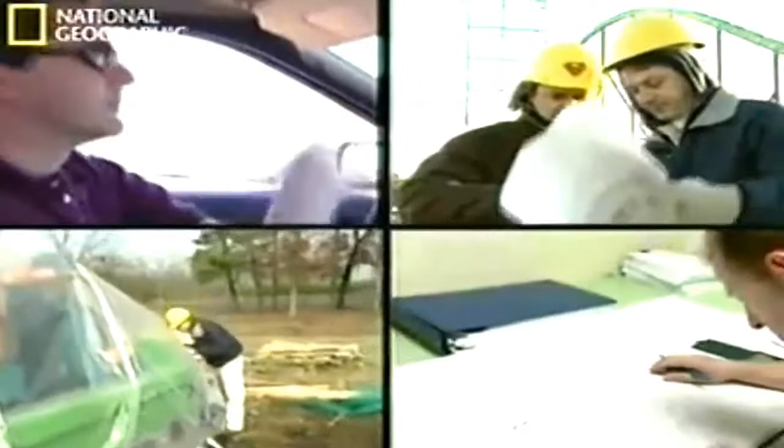This is ground zero of the roller coaster wars. On this empty patch of dirt, a crack team of engineers hopes to conquer the record books and build the coaster that rules them all. But it'll take a mountain of steel and technological wizardry to pull it off.

This is about bragging rights. For all its thrills, an amusement park's signature coaster is the one that counts. It is these monuments of pure power and speed that draw the big crowds.

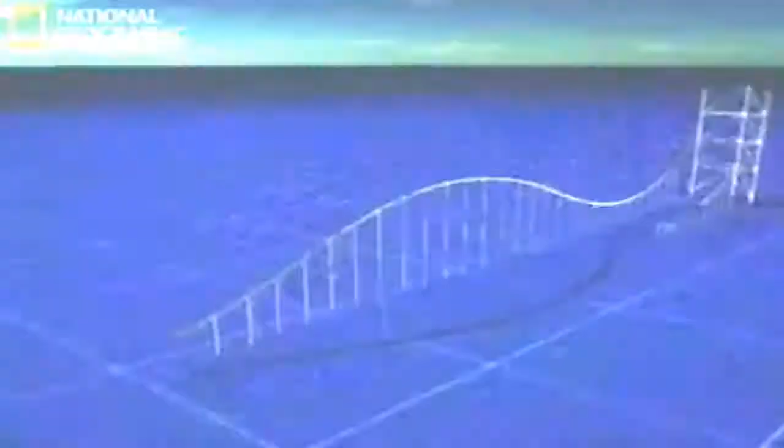If all goes to plan, they'll launch Kingda Ka in one year. It's a tall order, at 45 stories high, and accelerating from 0 to 206 kilometers per hour in 3.5 seconds. This ride will be the closest you'll get to getting shot off the deck of an aircraft carrier, or pulling out of a dive in an F-16.

We've got to bring a crane in. But are the designers behind Kingda Ka pushing the technology to the breaking point? The track record for this new breed of rocket coasters is littered with mechanical problems. Will it be safe? Is it worth the $25 million risk?

In the hyper-competitive world of amusement parks, you bet it is. When you tell the public that the tallest roller coaster is in your park, people who aren't interested in roller coasters or parks are going to take notice, and they're going to be curious, and they're going to want to go to the park to even just look at it, even if they don't ride it.

In the last decade, the roller coaster wars have escalated. 61-meter megacoasters have been around for years, but in the spring of 2000, Cedar Point Amusement Park in Ohio threw down the gauntlet, breaking through the 91-meter height ceiling with Millennium Force, the first giga coaster.

For speed freaks, the watershed moment came in 1997 with Superman, The Escape at Magic Mountain, California, shattering the 161 kilometers per hour barrier.

Up until 10 years ago, all roller coasters operated on a simple propulsion formula. A slow chain or cable lift pulls the train up the first hill, releases it, and gravity takes over.

Rocket coasters such as Kingda Ka have rewritten the laws of coaster physics, throwing out the idea of the slow ride up the first hill. Rocket coasters are shot out of the starting gate like a fighter jet is launched off an aircraft carrier.

The shuttle, or catch car, inside the track is locked into place like a coiled spring. The coaster is loaded onto it and cocked like the hammer of a gun. They pull the trigger and boom, away you go.

Simple. Not really. At least not at speeds in excess of 161 kilometers per hour, and not if you're the chief engineer, but we'll come back to that.

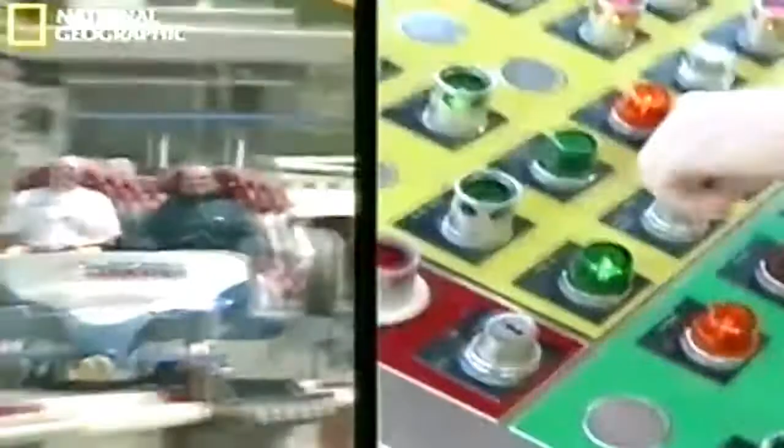In 2003, a new rocket coaster shocked the industry, taking launch technology to another level and shattering two world records. Top Thrill Dragster at Cedar Point, Ohio stands a gut-wrenching 128 meters high, making it the first strata coaster, accelerating to 193 kilometers per hour in about 4 seconds. It's the closest thing on wheels to a real top fuel dragster.

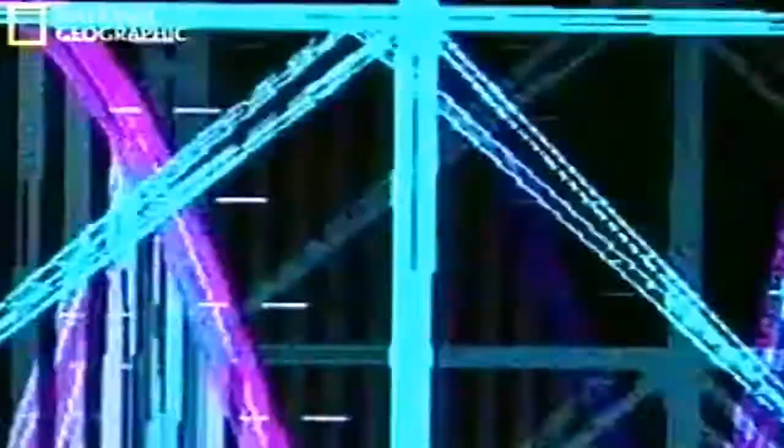Enter Kingda Ka, the monster ride destined to cut Top Thrill Dragster down to size. March 2004: the brain trust from Six Flags Great Adventure in New Jersey teams with Swiss manufacturer Intamin, the builders of Top Thrill Dragster. The concept for Kingda Ka is unveiled.

Yeah, looks like it's all here. Great. The idea is to begin with the blueprint of Top Thrill Dragster, but to build their new coaster, Kingda Ka, even bigger, faster, and better.

The amount of power for this ride is substantial. The stakes are higher, much higher. The question is, how far can they push the technology? Can it be done? Can it be done in time?

The money people are adamant. To be worth the estimated $25 million investment, it has to be ready to ride for the start of the next season.

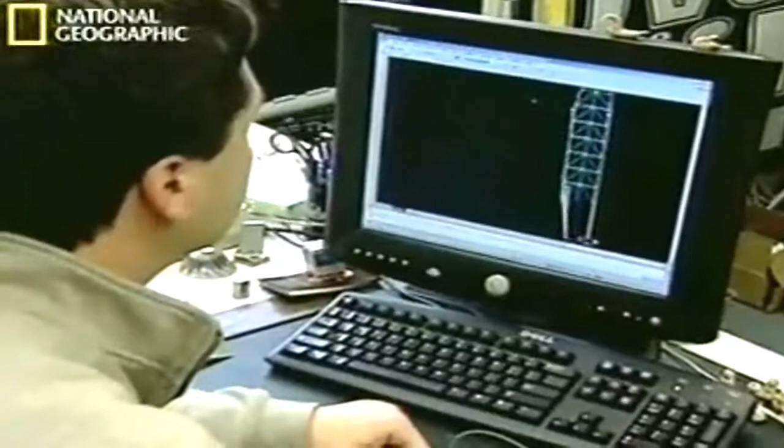Turning to one of the most sophisticated CAD design software programs around, the idea begins to take form. Every meter further and kilometer per hour quicker drives up the cost. Every change in the geometry of the track affects the stress on the rider's body. The formulas for G-forces must be recalculated. The design goes through hundreds of minor variations.

We talked about different heights, how high did we want to go. We looked at the possibility of one with two hills on it in the back, and we decided to stay with the single hill.

The final design is a 950-meter-long track, packing the maximum thrills into the park's allocated space. Its centerpiece will be this soaring 139-meter tower, 4/5 as tall as the Washington Monument, breaking the old record by 11 meters.

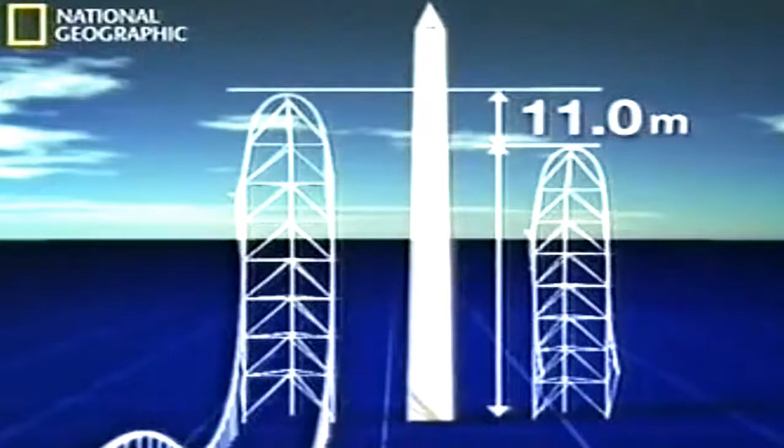The designers can even experience the ride from the passenger's point of view. First, the launch at 0 to 206 kilometers per hour in 3.5 seconds. You are shot up the tower faster than you can say, "Get me off this thing." Coming up to the top, we're going to slow you down real nice for that nice look around, and the next thing you know, you're going to be diving at the ground.

It's probably impossible to describe how this would feel to the average person who has never been in a jet fighter or maybe a motorcycle, but even that is no comparison. This will pin you in your seat. It's nothing like you've ever felt before.

Kingda Ka goes into production under a cloak of secrecy. If one of the other super parks were to find out about their plans and steal their thunder by launching an even taller, faster coaster, Kingda Ka would be a huge waste of cash. In this business, second isn't an option.

August 2004. An A-list of engineers converges on the east coast of the United States, daring to build the dream coaster. As they begin digging the foundation, their deadline is set: April 23, 2005. They have less than a year and the clock is ticking. So far, so good. If they fail, Six Flags will lose money by the bucketload.

Because of the magnitude of the project, we had to get an earlier start than we typically do for other coasters.

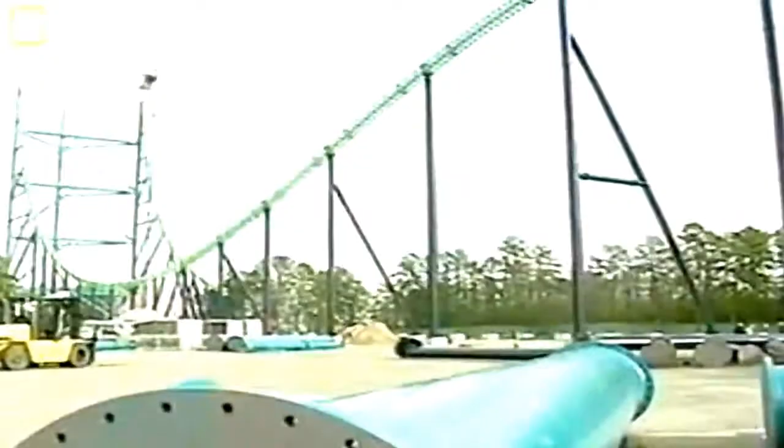One crew works on building the giant tower, while a second crew works on the smaller Camel Hump Hill, approximately 45 meters away. They take advantage of the warm fall weather to get as much of the coaster's track done as possible.

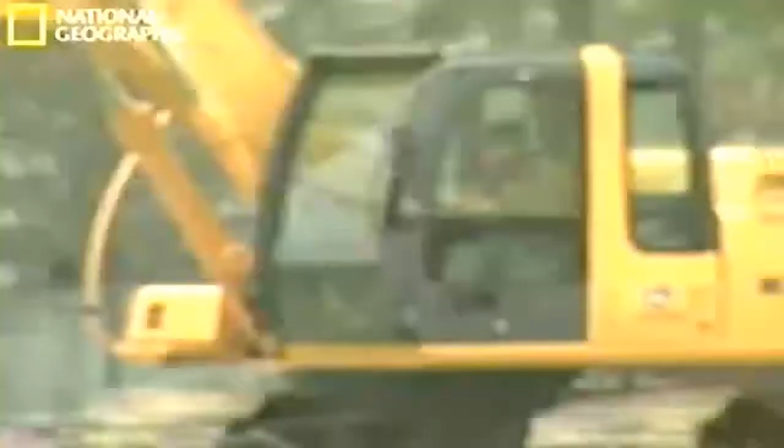By November, the coaster is beginning to take shape. The plan is to work non-stop 7 days a week, even during the winter months. But just when they're making progress, a severe rainstorm shuts them down. Little do they realize that this is just an omen. There is much worse to come.

It is now late November, and the brutal storm that has shut down construction of the world's tallest, fastest roller coaster shows no signs of letting up. The deadline of launching Kingda Ka next spring is in serious jeopardy. Every day the rain falls is like watching thousands of dollars go down the drain.

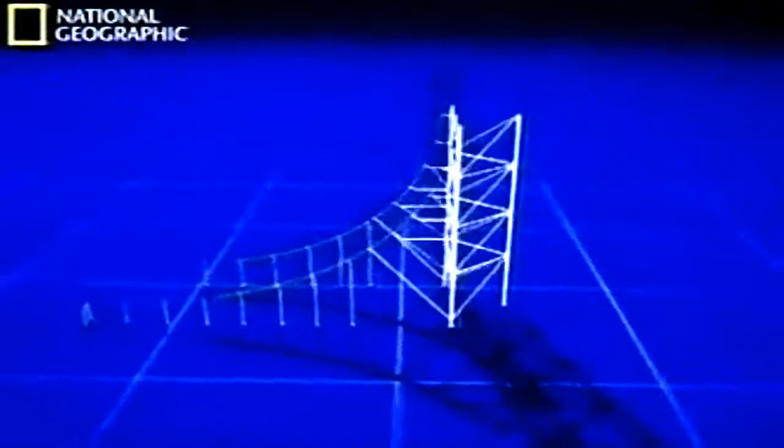One crew is supposed to be working on the mammoth 139-meter tower that stands half done. The other team is trying to finish the 39-meter high Camel Hump Hill. But work is at a complete standstill.

We've been pushing hard to complete the tower as early as possible so that we can avoid days like this for any of the high work. As you can see, there's nothing going on in the air. It's rainy and windy.

At these extreme heights, the danger from the heavy rain and winds is magnified. Moving around on dripping wet steel is inviting a fatal slip. The delicate task of maneuvering heavy sections of track into place is out of the question.

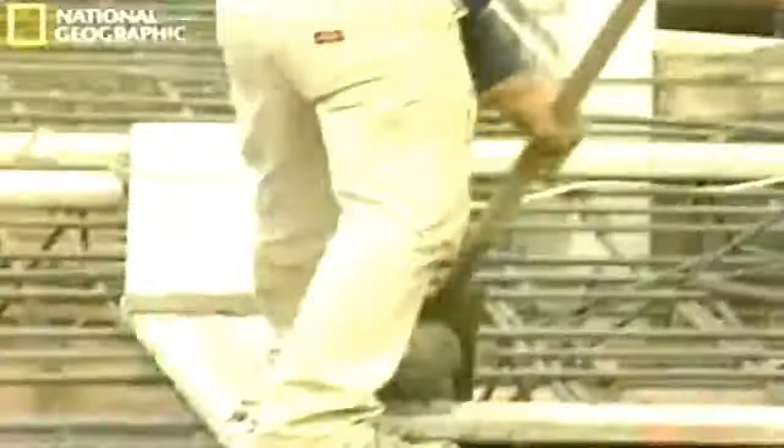Down on the ground, the picture isn't getting any prettier. The rain has flooded the foundation of the hydraulic room that will house the coaster's launch system, the heart and soul of the ride. The crew has extra work to do, pumping the water out. The clock is ticking, and it seems the hole just gets deeper and deeper.

Finally, after a lengthy setback, the storm abates. The crews will now have to work overtime to try and claw back the lost time.

Mother Nature's not been very kind to us. We've had problems. We've had a lot of rain. We've had a lot of wind. Yesterday we had fog, so we couldn't see the top of the tower from the bottom. The cold's not so bad, but the wind is killing us. We're behind where we want to be, but we're working hard to get caught up.

A few weeks later, it appears their frantic pace has paid off. The 950-meter-long track is taking shape. They're nearly halfway there. The team is about to achieve an important milestone.

The topping off of the Camelback, the second highest point on the coaster. This 39-meter hill is designed to give riders a last burst of airtime, lifting them in their seats as they crest the Camelback and head for the finish.

Its completion gives the crew a boost in morale, but they know they are a long way from the finish line. Looming in the background is a reminder of bigger challenges to come: the completion of the record-breaking 139-meter tower. If they're to have any hope of finishing the project on schedule, they need to top off this main tower by year's end.

Time for a reality check. There are now only 20 shopping days to Christmas, and the crews break for the holidays. They have more than 30 meters to go.

Every meter higher, the more difficult the task becomes. Right now, with days like today, it's a bit in question, honestly. We're going to keep pushing hard to make that happen, give everyone an early Christmas present, but it's going to be tight, really tight.

Then, almost on cue, Mother Nature intercedes. A wicked winter storm blows in. Temperatures and the spirits of the crew plummet. The wind chill is 26 below zero. The force of the winds is too strong, grounding the cranes. Once again, progress on the main tower is frozen. They have no option but to wait out the storm.

Throughout December, work on the tower moves in fits and starts. The storm eases. They rush to the cranes and attempt to secure another piece of track in place. Then the winds pick up, and the vicious circle begins again. It's a frustrating, expensive process. Anytime we have a hiccup or a slowdown in the field, it's an awful lot of money and time wasted.

As they move their way up to the 120-meter mark, they are in hallowed roller coaster airspace. Only Top Thrill Dragster, at 128 meters, stands between them and the record. Engineering at this altitude is extreme.

There is one silver lining. The unfinished structure is standing solid against the full force of the storms. Not too far from the New Jersey coast, Kingda Ka has to be built to withstand hurricane force, over 160 km/h winds. For extra reinforcement, there are catwalks that serve as lateral braces in the arch of the tower.

As the workers look down from their perch at 121 meters, the magnitude of the project begins to sink in. In spite of the setbacks, they are now only one rung in the ladder away from topping it off. Now only 2 shopping days until Christmas. There is hope. They schedule the topping off of the tower for the last week of the year.

Once that last piece is bolted into place, Kingda Ka will take the title of the tallest roller coaster in the world. But the New Year's celebration isn't to be. Another cold front moves in and the crews are sent home for a bittersweet holiday.

The only thing that is clear about Kingda Ka's schedule is that making their April deadline to launch the ride will be an uphill battle. And every centimeter of progress will be hard-earned. We've been trying to get it topped out for a little while now, and weather's been pushing us back between wind and rain and fog. We've been having a rough go of it.

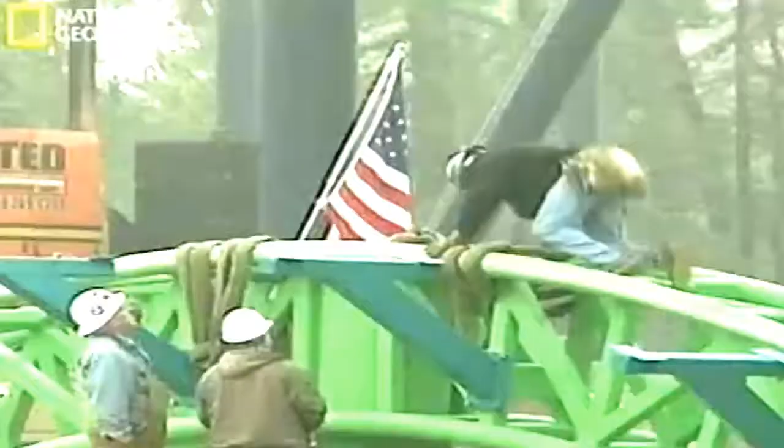The topping off will have to wait until the new year, when it finally happens it'll be the crowning moment in coaster history. If the final arching piece of track is even a centimeter off on either side, the tower will have to be reconfigured. With the eyes of the media and coaster fans watching, will this, the most important piece of the puzzle, be a perfect fit? The hopes of the engineers and the fate of Kingda Ka hang in the balance.

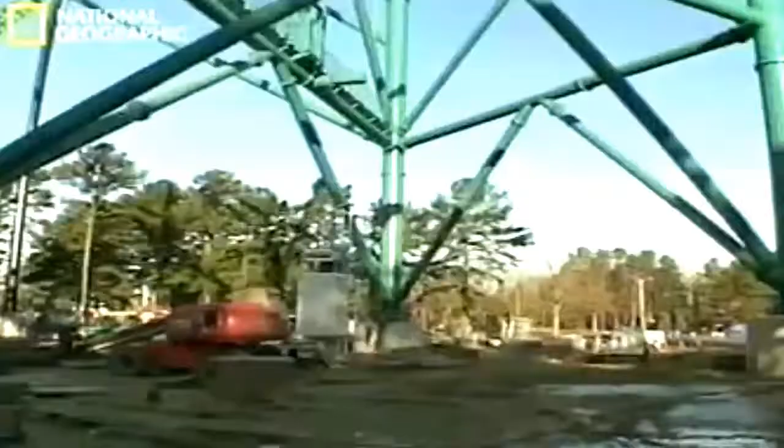Engineers are working overtime trying to top off the soaring 139-meter record-breaking tower of Kingda Ka. We're going to have to make the top first, and capture the title of the tallest roller coaster on Earth. It's now mid-January 2005. A horrible run of winter storms has delayed this critical event by nearly a month.

Today, the engineers are determined to make it happen, no matter what the weather. The crowd gathers early in the morning. The media has been invited in force. Cameras and eyes are trained on the top of the structure to witness this historic moment when Kingda Ka is crowned the king of the coasters.

Unfortunately, there's a new dilemma. Fog is looming all around the top of the tower. The crew can't believe their bad luck. This is a delicate operation, and visibility for the crane operator is essential. Will the engineers have to send everyone home and reschedule yet again?

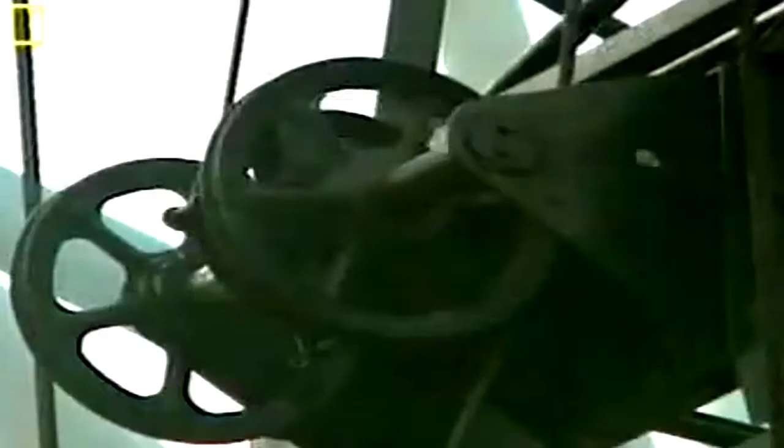They decide to go for it, hoping the fog will lift just long enough to fit the final piece in place. The crane team concentrate on what they call the pick. When they lift the crowning piece of steel track, it must be at a precise angle and level.

It's a long way up. The choreography must be perfect. So when we set the top piece on, we may have to push those track pieces out just a little bit to allow us to fit in properly. We can go very quickly, or it may take up to upwards of an hour or two, depending on how difficult it is to fit the piece in.

Almost on cue, the fog breaks, and there's a clear view of the top of the 45-story tower. Finally, it's time for liftoff. They make the pick.

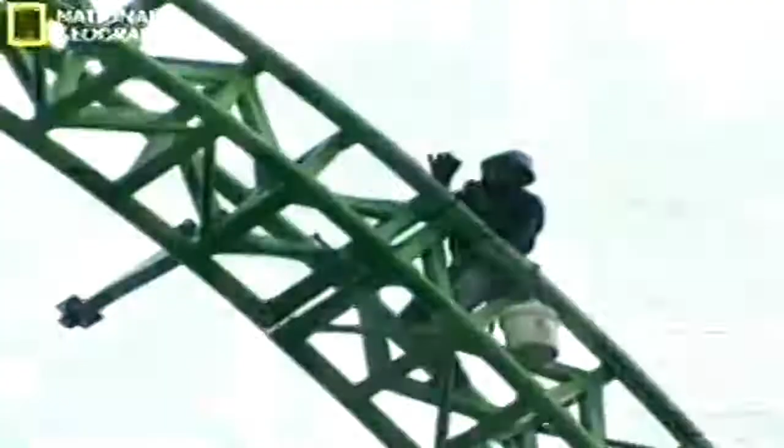Everyone watches and waits. The fit must be exact. It is a game of centimeters. Touching down. The Eagle has landed.

After all the weather setbacks and delays, the record-breaking tower is finally complete. It's an historic day for the engineers and entire crew at Six Flags. They picked it quickly, they set it in, and they were able to make it up very, very quickly. Much faster than I thought. I actually thought it would take a lot longer.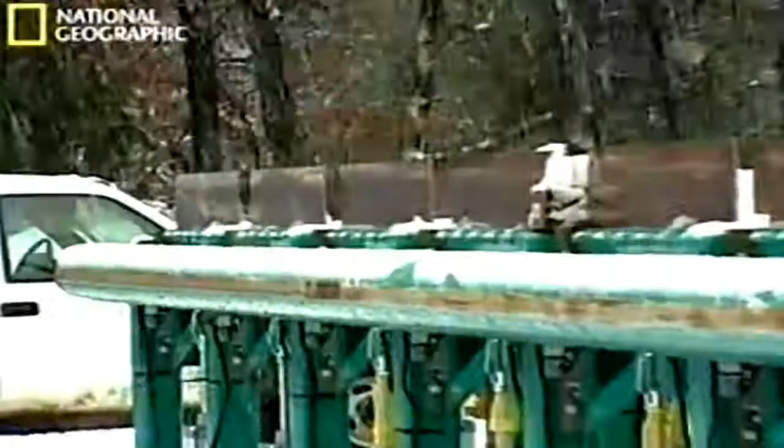But their luck is fleeting. Their nemesis has returned with a vengeance. Another bitter storm blows in and dumps over half a meter of snow on the job site. Instead of firing up the cranes, workers fire up the snowplows. Another day goes to waste.

While the track work on the fastest coaster on Earth is going painfully slow, there is good news at the base of the main tower. Inside this hydraulics building, the parts for the launch system are arriving as scheduled. It's like a late Christmas for the mechanics as they begin piecing together the components to the most powerful hydraulic launch system in roller coaster history.

Building the highest coaster in the world is a huge challenge, but the real catch is breaking the speed record. That's enough. 0 to 206 in 3.5 seconds is no joke. Unleashing this awesome power is a hydraulic launch system more massive than anything of its kind in the coaster world. 12,500 horsepower in a single blast, and more than 12 times the horsepower of a Formula One race car.

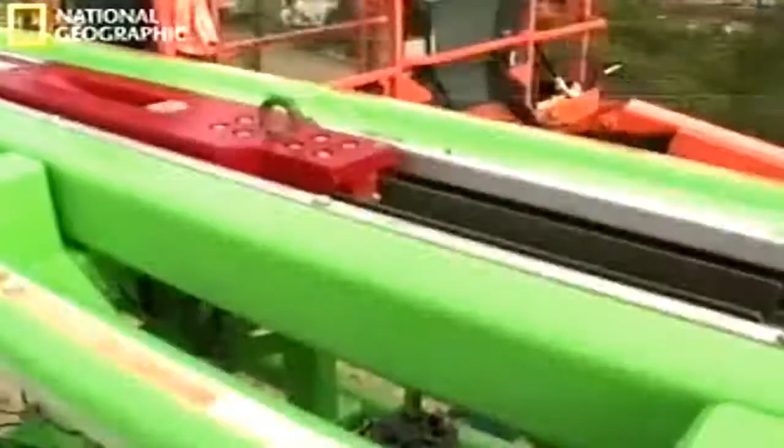The launch system is basically a high-tech catapult, and when it's all put together, it works like this. At the starting gate, the train of roller coaster cars are loaded and locked onto this red shuttle, called the catch car, which is pulled along the track on a cable. The hydraulics are what powers the cable.

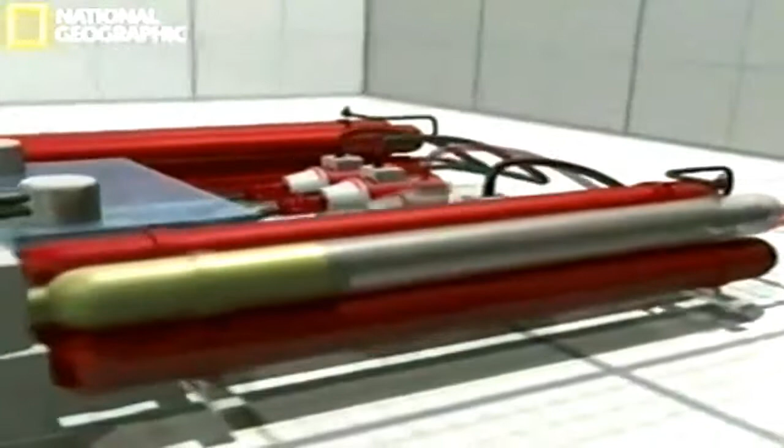When the operator pushes the launch button, there is no turning back. The hydraulics spring into action. 18,927 liters of hydraulic fluid is forced through a series of motors. The motors spin a giant drum that rapidly winds the cable, pulling the coaster down the track and up to the top of the tower.

The engineers like to think of the hydraulic system that powers the launch like a big squirt gun. I like to think of it sort of like the world's biggest super soaker system. A super soaker works when you pump the handle and you put high pressure air into that little tank, and you pull the trigger and the air blasts the water out. With a price tag of about $5 million, that's one expensive super soaker.

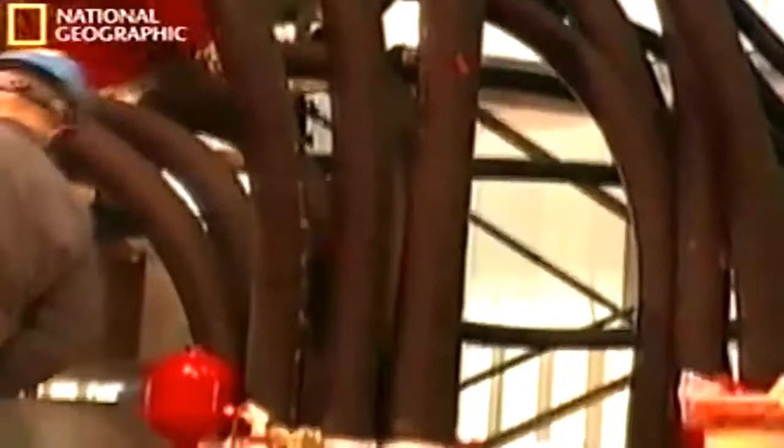After a few weeks of tinkering, the launch system resembles a giant spider. Massive hoses sprawl out of the drum and motors and connect to the hydraulic fluid reservoirs. It's slow going, but if they don't get every connection right the first time, they'll have to take it apart and start again.

They are still waiting for delivery of the most important component of the hydraulic system, the massive accumulator tanks that are the heart of the ride, pumping the hydraulic fluid through the motor that supercharges the coaster to record-breaking acceleration. Accumulators are like the heart of the ride. It's kind of like the way a heart pushes the blood around through the body. The accumulator pushes the hydraulic fluid through the motor so you can get the launch up to speed. Got it? That's good. The mechanics are getting nervous.

They should have come 2 days ago, but the trucks are running behind schedule because of the heavy snowstorm. But on the third day, their luck turns. The trucks carrying the accumulator tanks have arrived. The hydraulics are about to get a serious power boost. But first, they have to get them inside. Each of the 4 accumulator tanks weigh 18,143 kilograms. They'll have to be hoisted out of the trucks by crane.

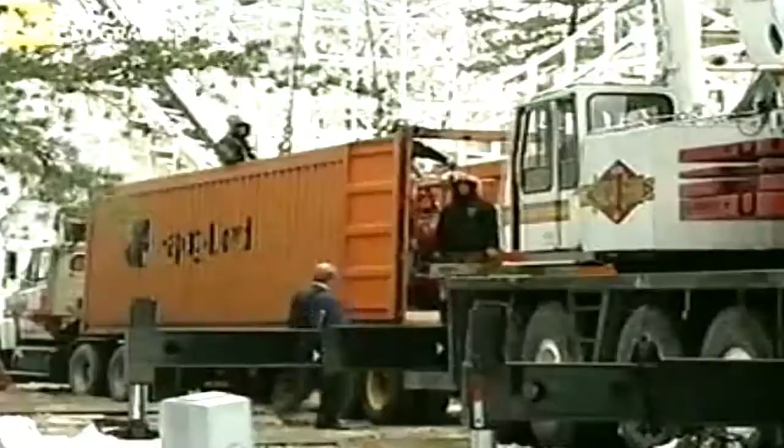One false move, one break in a connection could send the accumulator to a premature death. It would be a fatal blow to Kingda Ka. The accumulators take a year to make. There are no spares.

It takes all day, but at last the accumulator tanks are in place. And the countdown to the most powerful roller coaster launch in history has begun.

I've never dealt with a hydraulic system like this. But deal with it they will. In trying to eke out every last drop of acceleration, they must ensure that every last component of the launch system, the track, and the cars can handle the stress. Every part has a breaking point, a fact of engineering that might come back to haunt them when they least expect.

With the accumulators in place, they're poised to begin the next phase, the test launch of Kingda Ka. It's one thing to build it, but will it work? Will the biggest, fastest roller coaster on Earth clear the final hurdle?

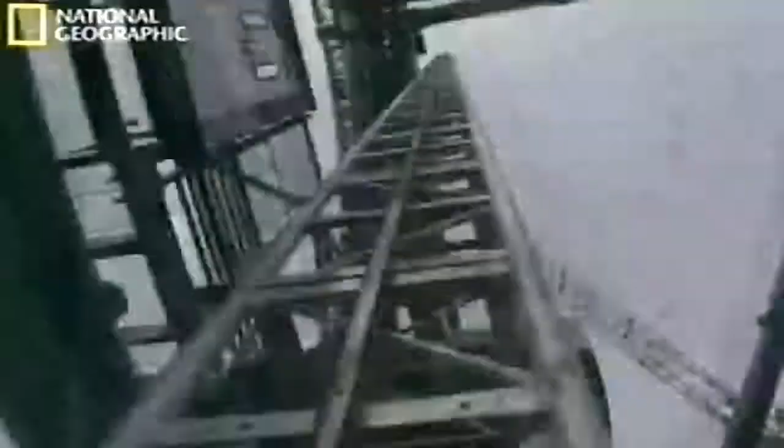February 15th, 2005. In spite of one of the most severe winters in the history of the eastern United States, the crew building Kingda Ka, the world's tallest, fastest roller coaster, have finally bolted the last piece of track into place.

But the delays have come at a cost. They're over budget and weeks behind schedule. Opening day, April 23rd, is fast approaching.

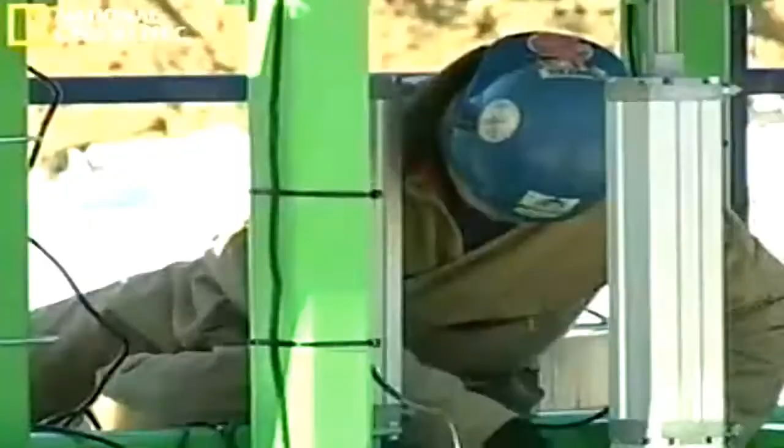At this point in the project, we're a little bit behind where I planned to be. We're working a second shift mechanical right now to try and get ourselves back on track.

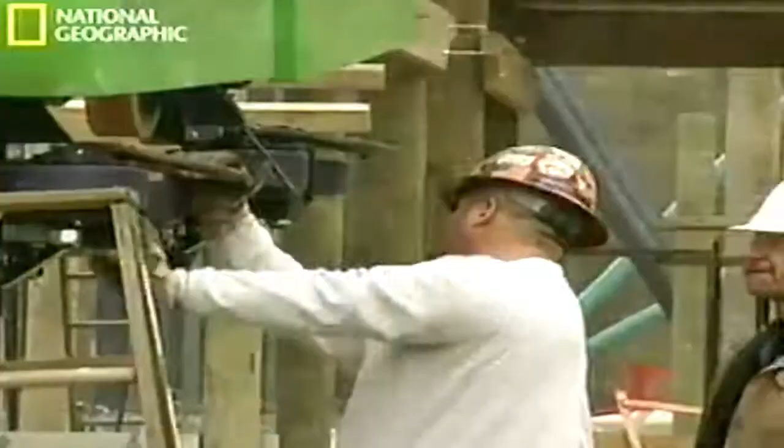That means getting the trains loaded onto the track. As the crane lifts each individual car into place and the crew guides the wheels onto the steel track, welders must shear down part of the track so the base of the train can slip over it. Every wheel has to be fine-tuned to glide perfectly along the rail.

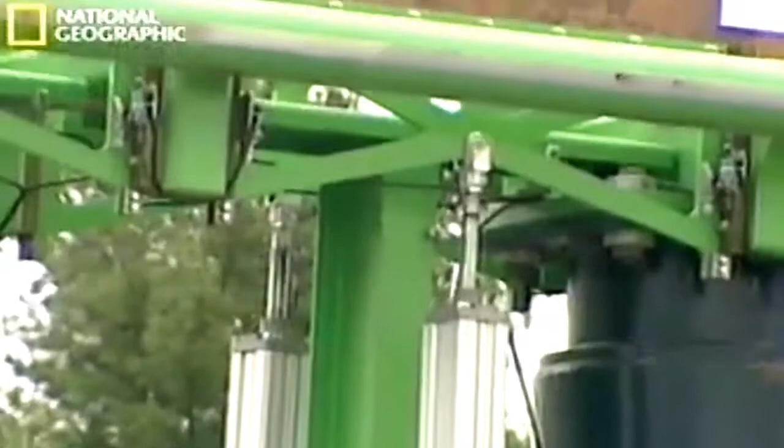They quickly move on to the next phase, installing 473 magnetic brakes along the track. When you're dealing with speeds of 206 kilometers per hour, you need a fail-safe method to control that speed.

From top to bottom, every joint and cross tie has to be a perfect fit. Every centimetre of track must be inspected to make sure there is clearance on all sides for the train and passengers to pass through safely.

The engineers are preparing to conduct a pull-through test, building a lightweight fixture out of wood to simulate the exact dimensions of a train car with the passenger's arms fully extended. The catch is they have to manually pull it around the entire track.

Checking the clearance on the lower parts of the track is easy, but the 139-meter tower is an entirely different story. They come up with an approach that has never been attempted before.

Set you guys up on there. Just take us up, drop us off with our fixture. There we go.

Down, move down. The crane delivers engineers and the fixture to the top of the tower. They must tie themselves securely to the track and move carefully. They're 139 meters off the ground with no safety net.

That side goes up, there you go. One wrong move or one misstep could be fatal.

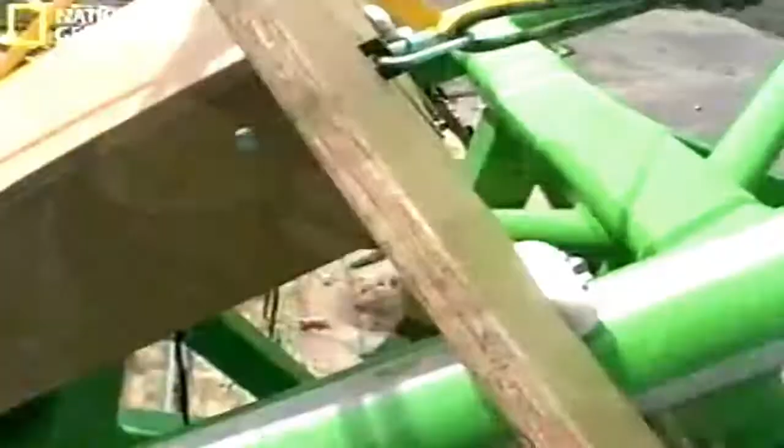Let's take a few moments here. Good? Okay, so it's running by itself now, right? Okay, so far so good.

A few minutes into the test, they hit potential trouble. Well, how was the clearance? We're about actually a half inch. About a half an inch? Yeah, three quarters of an inch.

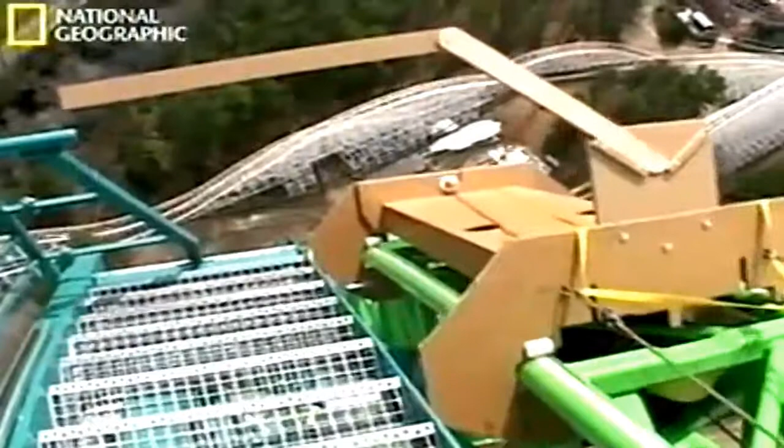The plywood extension that simulates a rider's arm appears to be about 5 centimeters over the line at the top of the tower. Yeah, we got about 2 inches. In this business, a centimeter or two is huge. It could mean rebuilding this section of the track. 2 inches over the top of it.

It's not over the side, though. They remeasure on the spot. It turns out their plywood arm is a few centimeters longer than the required safety envelope. A false alarm, but the delay is costly.

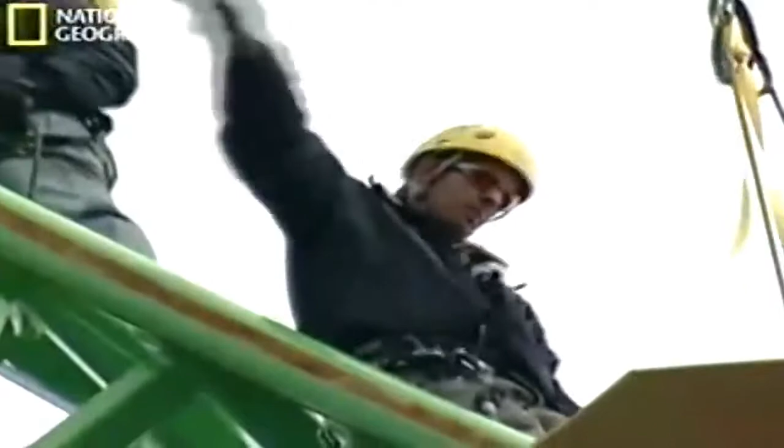If they don't finish the test before dark, they'll have to start all over again, from the top down tomorrow morning.

10 hours later, and the light fading fast, the engineers are back on solid ground. The track is all clear.

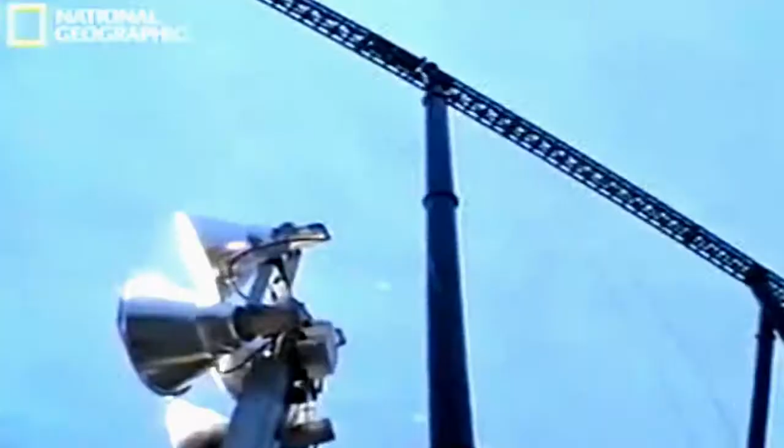Every little test like this, or big test like this, is one step closer to opening it. With computer and system checks complete, it's finally time to launch the train.

So you'll see that train roll backwards just a little bit, and then they'll know it's there, and then it'll launch and go.

Engineers have been waiting for this day for more than a year. It's time to see if their hard work will pay off. There's always a little bit of apprehension until the first train gets all the way around the track to make sure there aren't any mechanical interferences.

They conduct their first launches at night, so they don't interrupt construction work around the launch area.

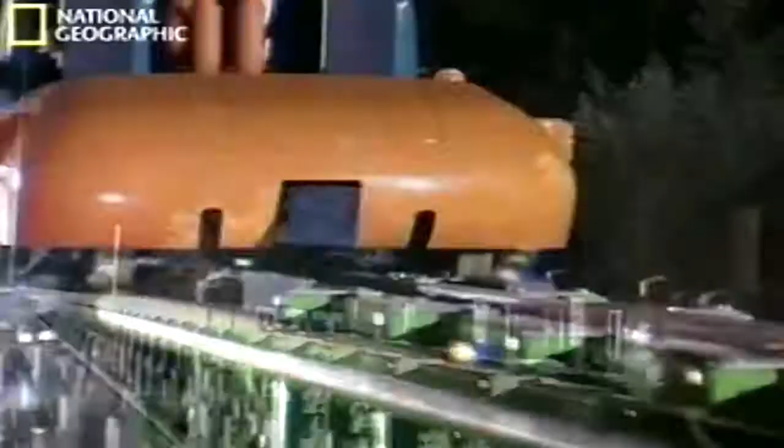They begin launching the train at slow speeds, easing their way up to 206 kilometers per hour. By 3 in the morning, they're ready to try launching at full speed. It'll be a huge victory if it makes it over the top on the first full-powered run. The trainer has to move the catch car back and forth to be in automatic position.

But there's a problem. At full power, the train does not clear the tower. They recalculate, adjust the launch settings, and try again. They work through the night. With the sun beginning to rise, they think they've cracked it.

Jeff, are we ready? Go ahead, Jeff. All right, here we go.

Get over there. I can't believe it got up that high. I didn't think it would. That's a tease there.

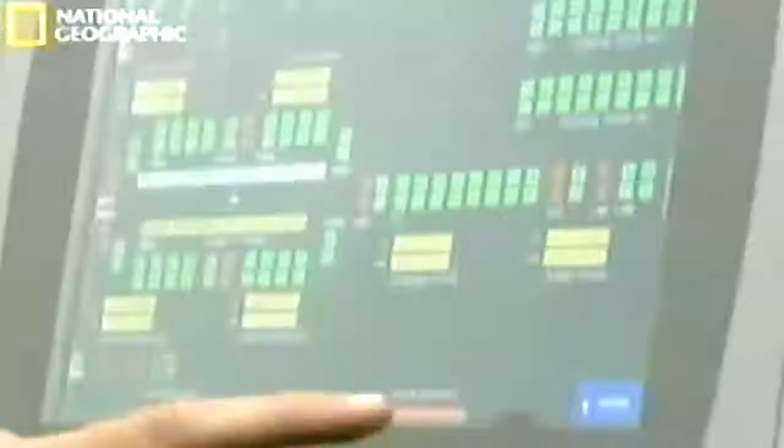The engineers boost the hydraulic power, reset the computer, and load up the coaster for one last try. If it doesn't make it over the top this time, it could mean serious problems with the hydraulic system.

Okay, Michael, get it right this time. Stand clear.

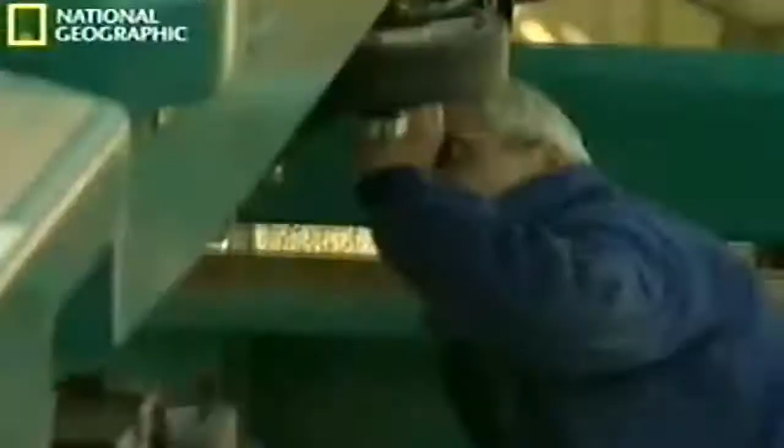Well, that looks nice. The train finally clears the tower. They're ready to move to the next phase, launching a train full of test dummies.

Okay, is the plan to run the loaded one out and launch it too?

The plastic dummies are filled with water to simulate the weight of 18 passengers. The hydraulic launch system is straining to propel the empty trains up and over the top of the tower. Now they have to step up the power surge to push the heavier load over the top. Will it be enough?

You're going to pull forward.

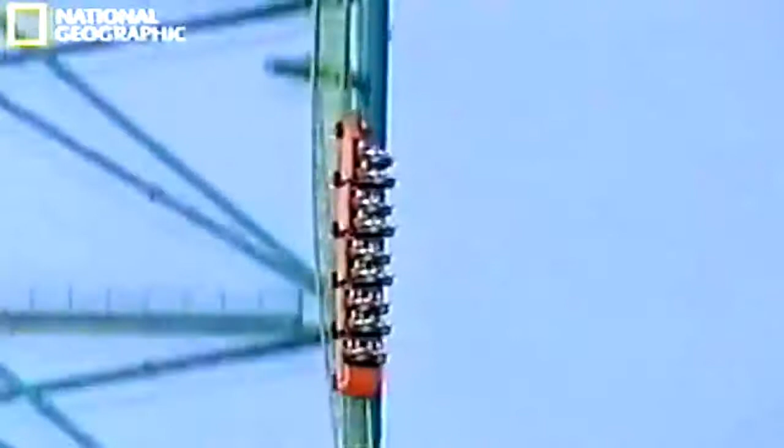The train cascades backwards. They reset and try again. Not looking good. The hydraulics seem to be okay. Suspecting the problem is in the catch car, they call it a night.

The following day, they call in the specialist.

Joe, the catch car isn't coming back. I don't know if they've been in manual or whatever.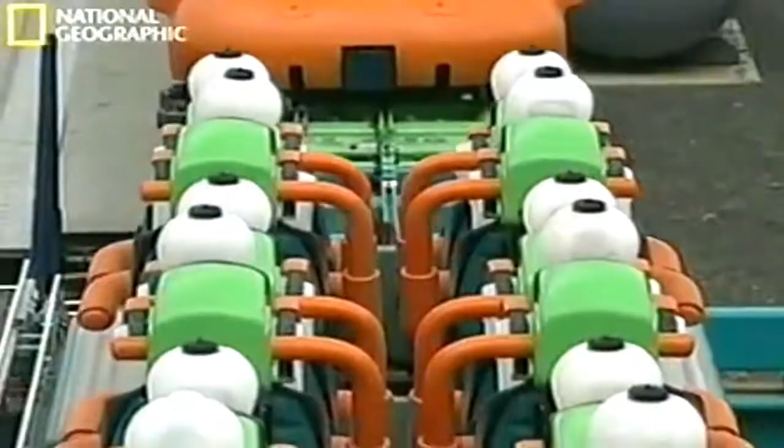A few hours later, they're ready to try again. Ready to launch. How about you, Jeff? I'm clear. It's a last-ditch effort. If this doesn't work, the catch car will have to be replaced. The whole season could be lost.

It's a success. After more than a year of planning and construction, the ride finally appears to be working smoothly.

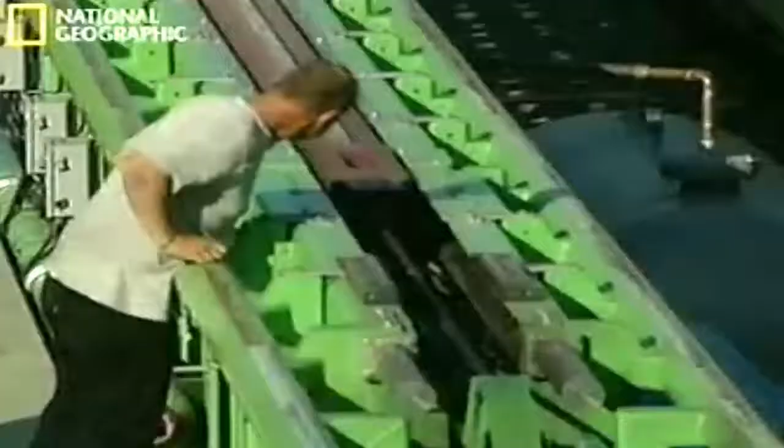Their victory is short-lived. After repeated test launches, an inspection reveals that the launch cable is already wearing out. The engineers are forced to stop the test launches less than 2 weeks before the scheduled opening.

After all this work to get it up and running, patience is now wearing thin. If they don't get their green light, then we'll come down and figure out what's going on.

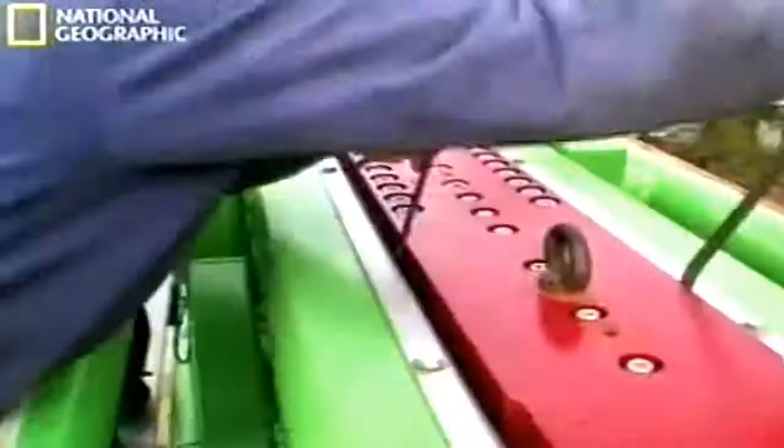The public unveiling of Kingda Ka is pushed back by nearly a month, but that is the least of their worries. If they don't figure it out fast, they may have to put the brakes on altogether. The whole summer season is in jeopardy.

April 23rd, 2005. It was meant to be the grand opening of Kingda Ka, but the world's tallest, fastest roller coaster is going nowhere fast.

Unfortunately, the engineers are still tinkering with the complex cable launch system that is supposed to catapult the roller coaster out of the gate at 206 kilometers per hour and up and over the 139-meter high tower.

Night after night, they fire off unmanned test launches to try and work the problem out. We have some cable tension issues. We don't want that to happen on this. We've got to keep a proper amount of tension on the cable.

They decide to replace the entire cable that catapults the train at record-breaking speeds up to the top of the tower. The next night, they fire up the most powerful hydraulic launch system of its kind and hope for the best.

If they can work out the kinks, these same engineers who built Kingda Ka from the ground up will get to ride her first.

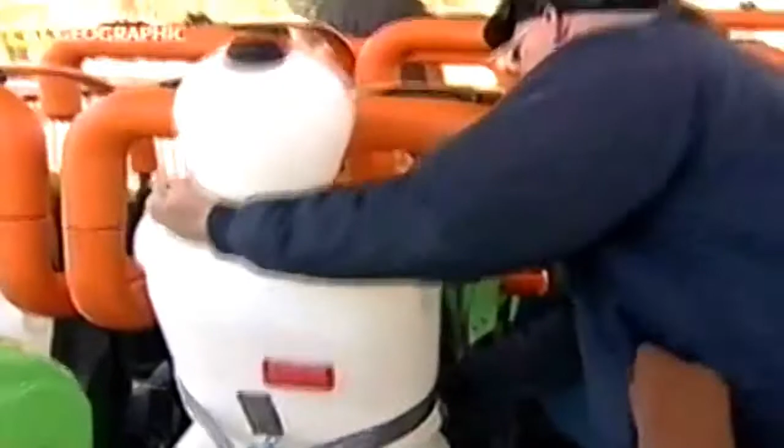But until they get the kinks out, the only passengers they can risk are the water dummies. No, the water dummies were fantastic, fantastic riders. They didn't talk back. They were a little quiet. We were looking for a little more response out of them, but no surprises from them.

The water dummy launches go smoothly.

The engineers move on to testing the coaster at full capacity, running multiple trains in succession and hoping the new cable doesn't start to slip. We've got to continue cycling it. We want to prove it out, get rid of any nuisance issues, so that it runs consistently.

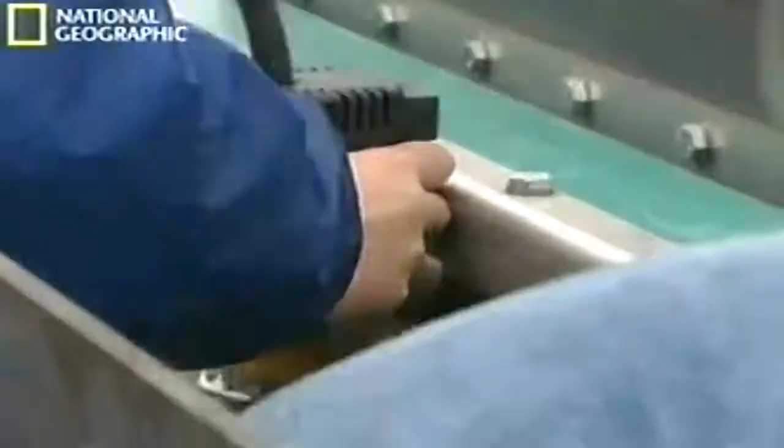We're testing all the different safety devices to make sure that everything that we need to monitor is being monitored, and verifying that those are all working. Once we've done that and checked the system response, then we'll be ready to put people on it.

We're getting there. You can see the light at the end of the tunnel. Four weeks and nearly 600 hours of test runs later, Kingda Ka is declared sound. It's a month late, but even still, a remarkable feat of engineering. Ten months after breaking ground, the king of all roller coasters is finally ready for its first real passengers: the engineers who built it.

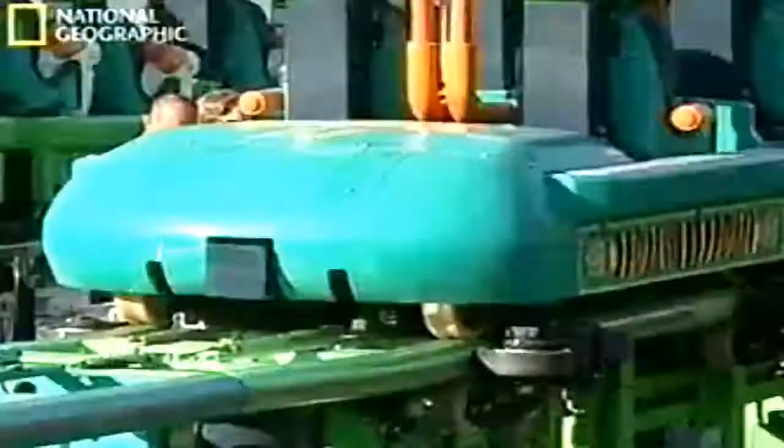Even for the team who put her together, piece by piece, being the first to ride Kingda Ka is a daunting prospect. We've gone over everything twice, we've verified it, and everything is good to go. This ride might turn your hair gray.

All right, lap number 1. After months of back-breaking deadlines and sleepless nights, they're finally about to make history. Yeah, we're going to be down there, and then there, and then back here, and over there, like that. Yeah, number 1.

Look at that! Woo! Yeah! Woo! That is it. That nails it.

The launch: 0 to 206 in 3.5 seconds. Straight up the tower, 139 meters. The drop: 127 meters sheer vertical. 50 seconds, and 3 records bite the dust.

The most insane 50 seconds of your life. Kingda Ka takes the title of the biggest, fastest roller coaster on Earth. It was worth waiting for. It's a 50-second reward after nearly a year of hard labor.

Oh, outstanding. The acceleration just keeps going and going. It just doesn't want to stop. And then straight up — you try to talk and you can't talk.

All right, best part is at the top when you come down that spiral, look at it twist right at the ground. Look at the view. Hanging nice, the brakes work good. Spiral — coming over there and you look at just this much track in front of you and you're still screaming along.

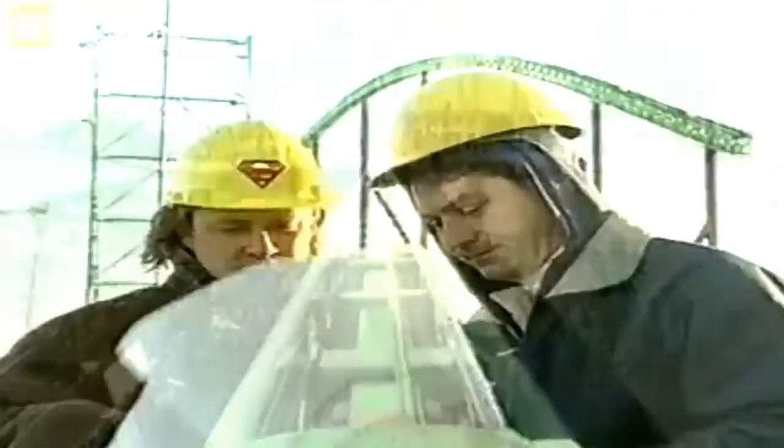It's a momentous day for the engineers and in coaster history. It's been a long road to the top. I thought this project was going to be quite a challenge, and it's been an enormous amount of hard work and reward. It certainly lived up to all the expectations I had for a challenging project.

Everybody please count down with me to help launch the tallest and the fastest roller coaster on Earth, Kingda Ka. Kingda Ka finally opens to the public just one week later. Coaster enthusiasts from around the world clamor to be the first to ride the record-breaking coaster. Awesome, dude! Woo! Awesome.

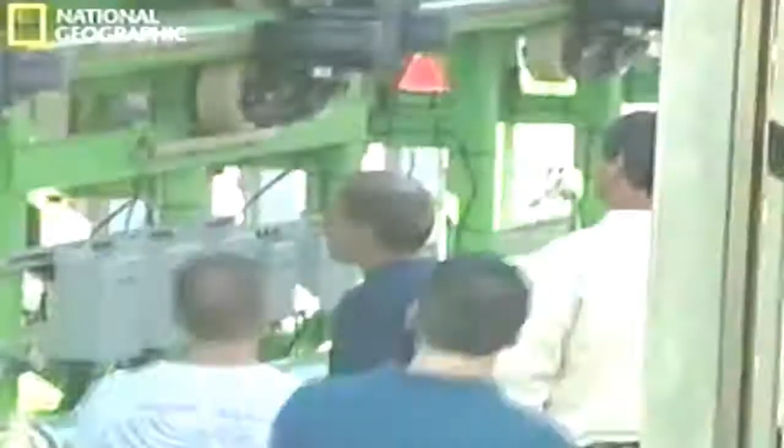Kingda Ka's moment of glory is short-lived. A few weeks after the grand opening, the ride comes to a screeching halt. According to Six Flags, a bolt in the track sheared off during an unmanned test launch, ripping out a piece of plastic liner and damaging the brakes on the train.

For almost two months, the entire area around Kingda Ka is sealed off. The trains sit idly, while rumors circulate about the demise of Kingda Ka. Will the greatest coaster on Earth be back?

In early August, the announcement finally comes: Kingda Ka is fixed. Engineers order and install larger custom-made bolts from the coaster's manufacturer to keep the liner that's inside the launch track from coming loose. This time, there is no grand opening, just a sigh of relief.

The team behind Kingda Ka have learned the cold truth. If you want to be the champ, you can expect to take some hard knocks on the way to the top.

The question is, how long will the reign of Kingda Ka last? I'd be very excited just to hold both records, tallest and fastest, for a long time. But there's always someone looking to break that, and we'll look to get it back if we're not able to keep it.

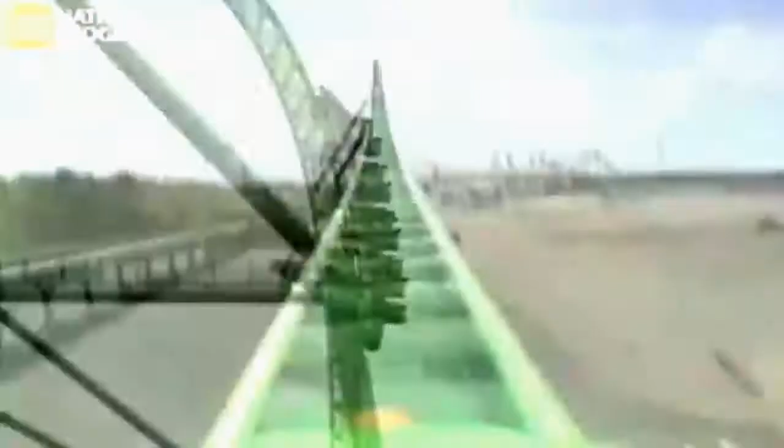It was only a few years ago when 161 kilometers an hour and 121 meters seemed insane. With the rise of this megastructure, there is no doubt someone out there is already plotting to build the next supercoaster. In the escalating coaster wars, there's no such thing as too high or too fast. But for now, Kingda Ka is the new king of the hill.